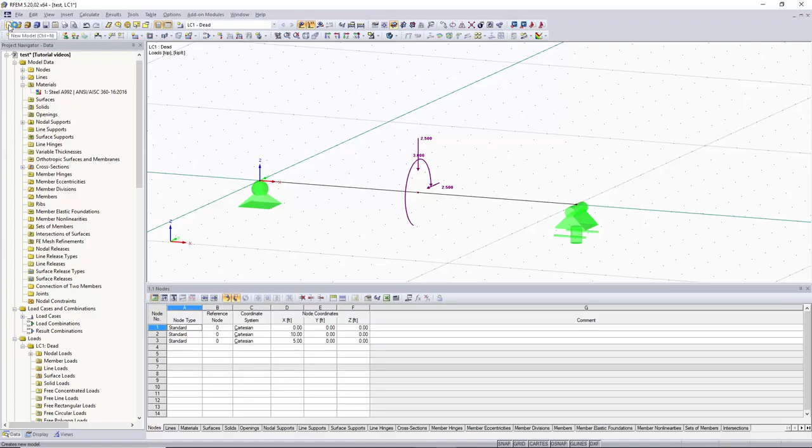To start off, we will create a new model by going up to the New Model button. We can call this model Video 6. Everything in here looks okay, so we'll click OK.

As you can see, we have a blank grid where we can create our simple span beam. To do this, we'll go to New Line, and we'll make it a simple beam from the origin 10 feet away along the x-axis.

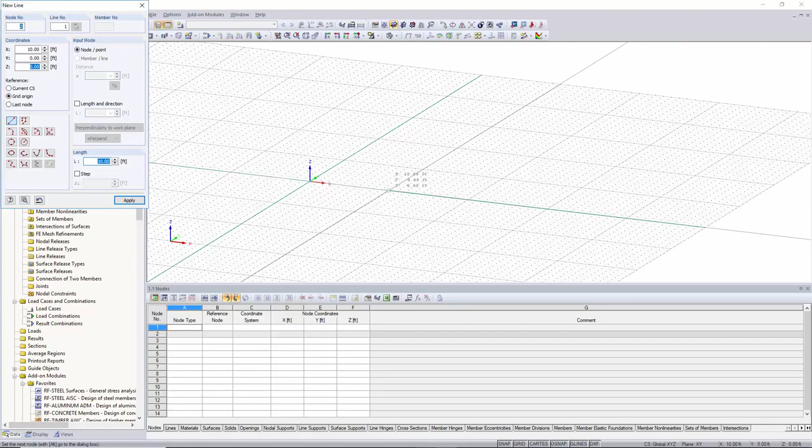Now that we have our simple line, we'll add some line supports. Our first end support will be a fully fixed support, and for the second end support, we will create a new one restrained in rotation about the x-axis, and we'll allow it to move in the x direction. We'll click OK, and then we can graphically assign it to our beam.

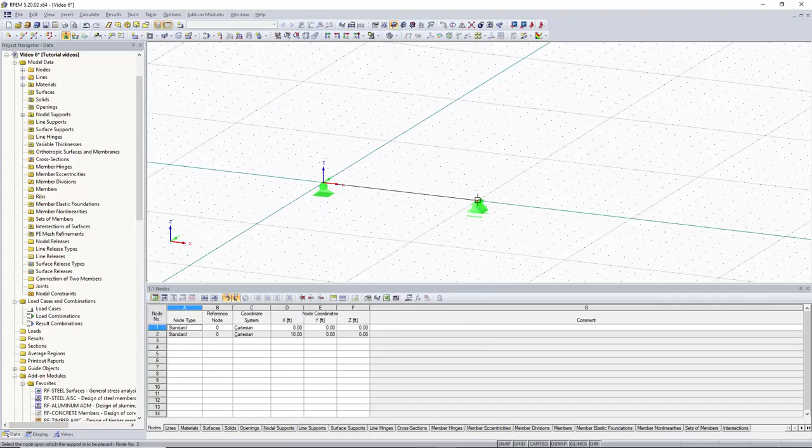Now that we have our beam, we would like to apply nodal loads to it. To do this, we can go up to this button called New Nodal Load. Since we don't have a load case created yet, when we click on a new load, it's going to ask us to create a new load case, and this pop-up window will come up.

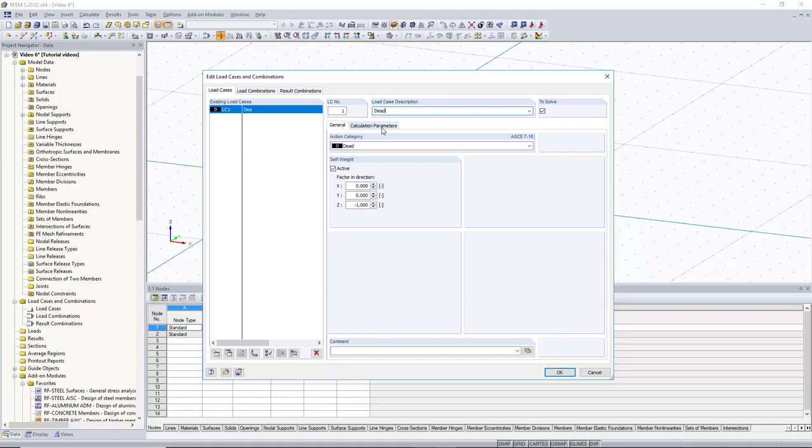For our load case, we'll keep the action category as dead, and we'll name this one dead load. The self-weight is activated, and that's okay. We'll click OK. Now our new nodal load box pops up.

You can pick which way you want your point force to go, either the X, Y, or Z direction. On the right side, you can create a moment and pick which axis you want it to rotate about. For now, we'll have a -3 kip force in the Z direction, and we can also apply a rotational moment about the y-axis, and make this one 3 kip feet.

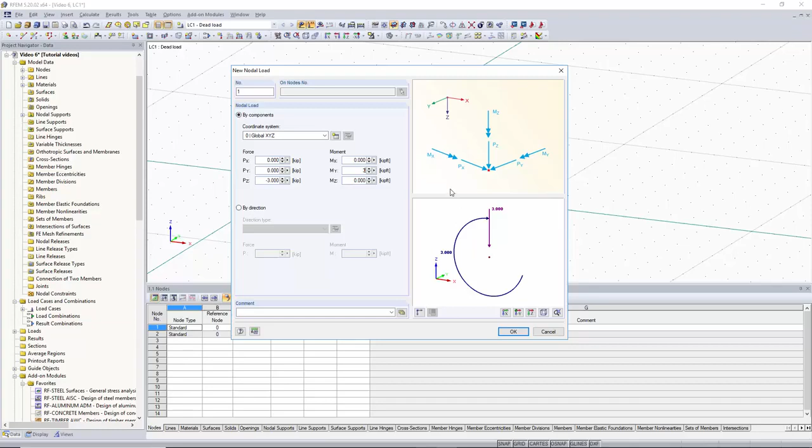In the bottom right hand corner of this window is a graphic area that shows you the loads you are about to apply to whatever node you're going to graphically select. Once you hit OK in this window, you will see that your cursor has an icon next to it, meaning you can apply these loads to any node you would like.

For now, we'll just click on one of our end nodes, and now you can see graphically the loading that's applied. We can right click anywhere in the graphic area, and this will cancel out our selection. Now you can see there are no nodes along the span of our beam.

If you want to apply a load somewhere along the span of the beam, you're going to have to add a node. To do this, we can go up to the button called New Node, and now you can add a node using coordinates, or you can also do it graphically.

Right now we'll do it graphically, and you can see that when selecting, your cursor will snap to the exact midpoint of the beam, which is 5 feet. We'll left click, and then right click anywhere in the window, and now you can see that we have a node in the middle of our span.

With this node here, we can go up to our New Nodal Load button. We already have our load set. We can also change any of the loads if we would like, or add a load, or decrease or increase the load.

We can click OK, and now we can click on the node that's in the span of our beam and apply the loads that we want to. We'll right click anywhere in the graphical area to cancel out the tool.

Now I'd like to show you how to add nodes to multiple points on the beam instead of just the midpoint. We'll delete our loads, and we can also, by highlighting the node from left to right, select it without selecting the beam, and hit delete.

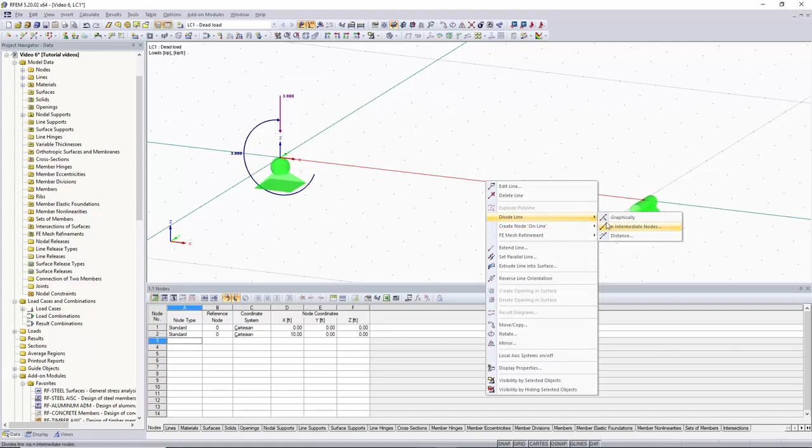To add multiple nodes to the beam easily, we can go to the line, right click, and click on divide line, and we can do this graphically. You can see this pop-up window comes up where you can pick the spacing and the difference between the spacing and apply nodes that way.

Or you can also, which is nice, go into the graphical area, and you can see that the points on the grid act as snap points if you want to place nodes anywhere that correspond with the grid points. So click on grid point 4, and that splits up the beam right there. We can keep splitting up the beam at these grid points. We click divide and click exit, and now you can see our beam has been split up at these grid points it's connected to.

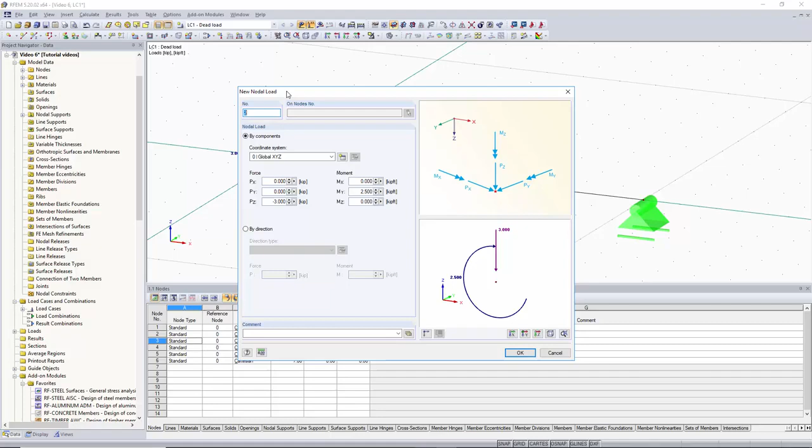We can then go to our new nodal load button and click OK, and then click on our nodes and add our nodal loads to them very easily. As you can see, our member was divided into separate members. We can easily get rid of these loads by clicking Ctrl Z and get rid of our nodes. Now our line is back to just being one single line with no divisions.

You can also right click on the line and divide the line by n intermediate nodes. Now you can pick how many nodes you would like to divide the line by. We'll keep it as 1, and click OK. Now you can see it equally divides the line up with one node in the middle.

Now if we would like to divide the line by the first quarter of the line, we can right click on the line, select divide line, and go to distance. The first thing we would like to choose is type of division. We're going to divide the line by new intermediate nodes. You can also place a node without dividing a line if you'd like.

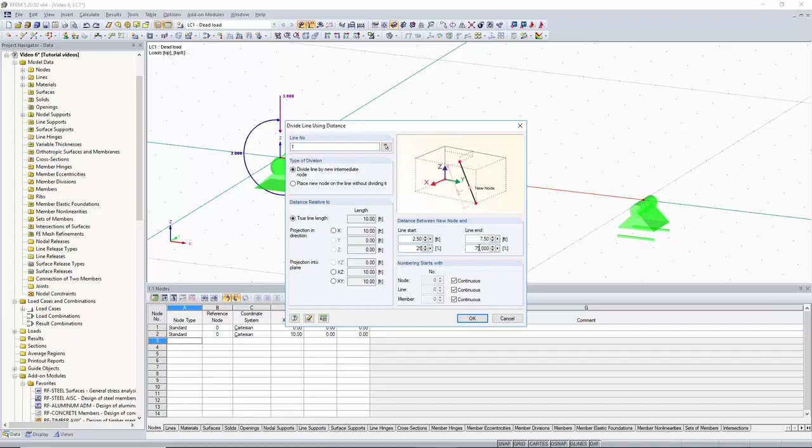We're going to do this using the true member length of 10 feet. You can see how this works up in this graphic area. We want the node placed 25% of the member length away from the start of the line, which is 75% of the member length away from the end. You can see that automatically adjusts over here. So we'll click OK, and now we have a node that's 2.5 feet away from the beginning of the line.

We can apply our nodal loads by clicking new nodal load, clicking OK, and clicking on the node. Now we would like to run our results.

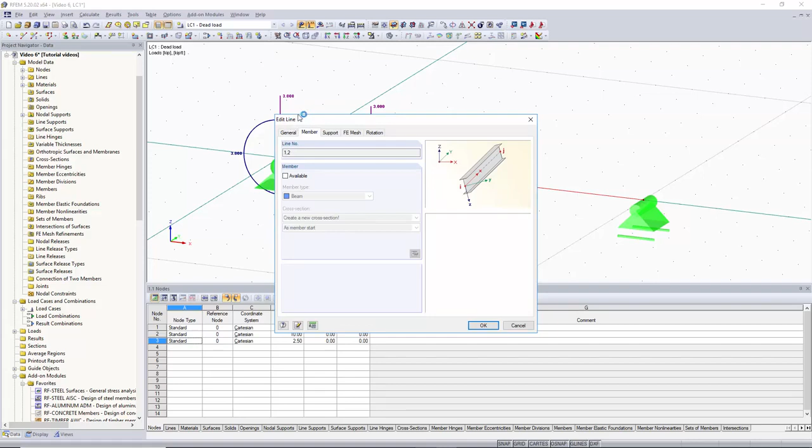Right now there's no cross-section or material set to our line, so we're going to select both of our line segments, double click on them, and the edit line box will come up. Up here in the member tab, we want to click member available. We can then go to our cross-section library and select which cross-section we would like to apply. We'll just apply a W30 by 90, and click OK.

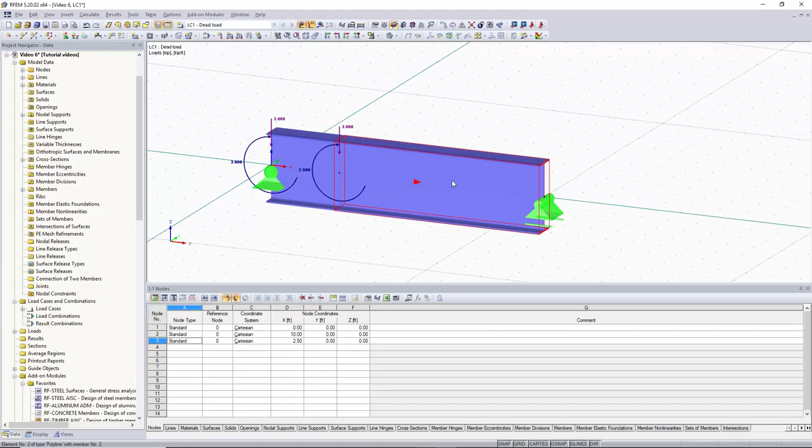As you can see, our material is set to steel A992. We'll click OK, click OK again, and now we have our rendered cross-section and material along with our loads. We'll run the results, and as you can see, turning this into wireframe view, we get our deformation along with our member diagrams for our moments and our shear.

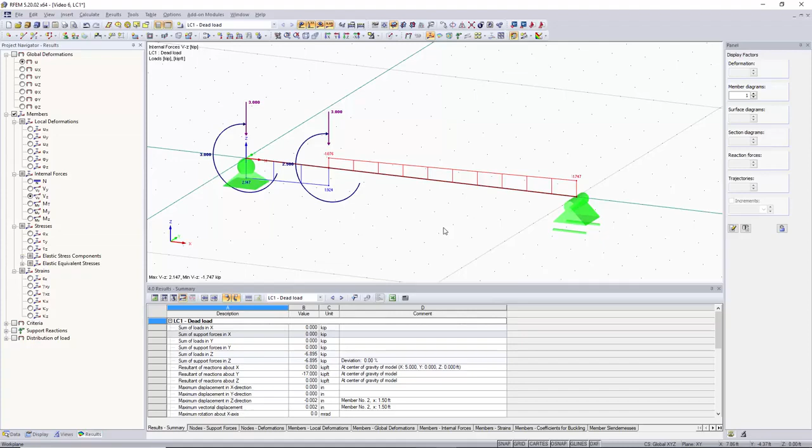So thank you for watching. I hope this video is useful, and how to apply nodal loads is now more familiar to you. In the next video, I will be going over how to quickly apply a set of point loads organized as a member load. Thanks for watching.